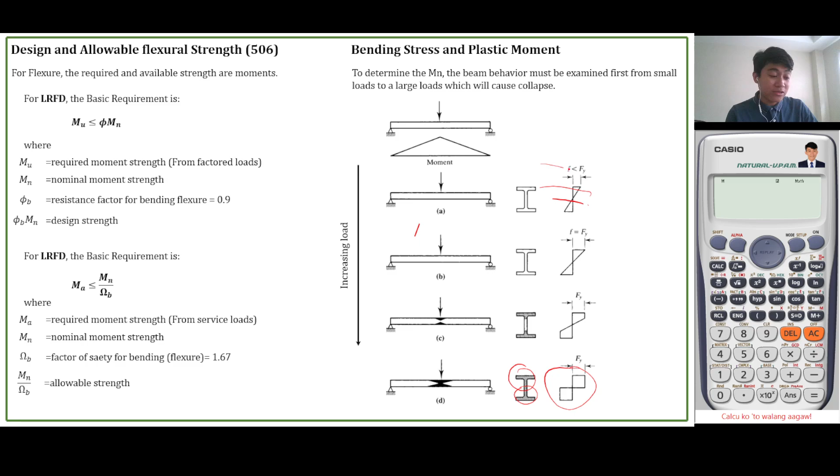Here it's still elastic, an elastic condition up to this point. Here it's transitioning from elastic to plastic condition. This part is purely plastic - it's about to collapse, guys. As you can see, the stress distribution is uniform, at the yield stress.

So if you try to analyze the compression force acting on the compression block, this is now your compression area, and this is the tension area of your steel. The uniform stress Fy, since this is already yielding, is uniform on compression and tension. So the compression force will act on the centroid of the compression area - compression force is stress times the area, area C, area of the compression block. That is also equal...

Take note, the forces here must be in equilibrium - tension must be equal to compression, so that it doesn't yet collapse, because it's still in equilibrium. So the tension is equal to the area of the tension side times the yielding stress.

So what we're going to do is calculate later the moment capacity of this section. The moment capacity is the induced moment by the compression and tension force, or the resisted moment of the compression and tension force - that is your plastic moment.

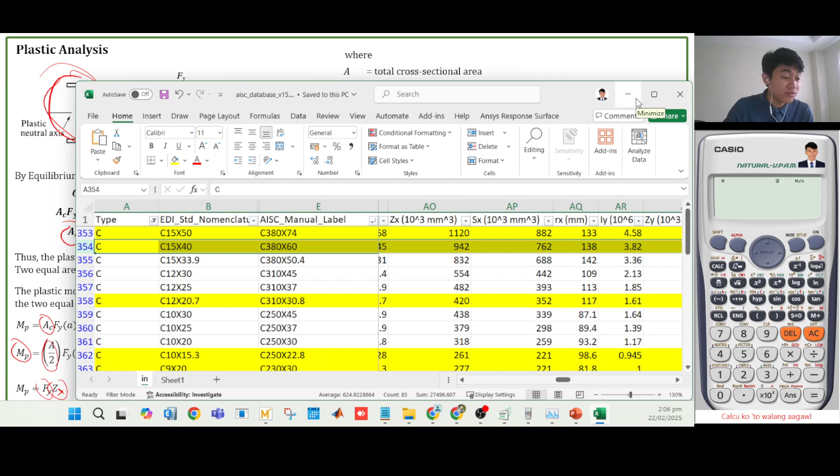We have a channel, 380 by 60. So we have the value of Zx, which is 942 times 10 raised to 3. The AISC database already consists of those calculated values of section modulus, and that's how we compute the plastic moment: the yielding stress times the section modulus Zx.

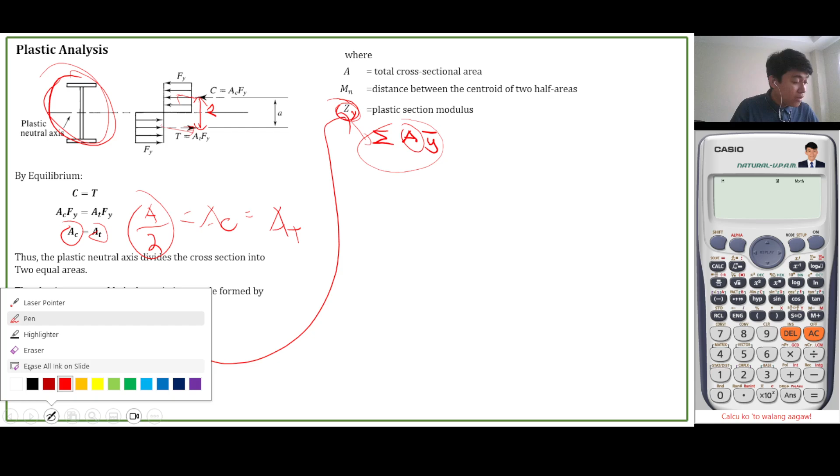What if we have a built-up section? How do we solve this Zx? Because for a section that's in the database, the section modulus is already given. But for a built-up section, you have to solve for that.

So let's try to solve problem number 1. Let's try to solve the plastic and elastic moment. What is the difference between the plastic and the elastic? Let's try to solve it.

Now, we have here a built-up section shown in the figure. It will bend about the x-axis. The steel is A572 with an Fu of 450 megapascal and an Fy of 345 megapascal. Determine the yield moment, the plastic moment, and the shape factor of the section.

Let's get the section properties. Actually, it is made up of plates. The base flange is 250, so let's put the dimensions: base flange is 250, thickness of flange is 25. But this is made up of plates.

So the D is 360, because we have a plate 360 by 16. So the total depth is 360. The thickness of web is 16. E is 200 gigapascal, Fy is 345 megapascal.

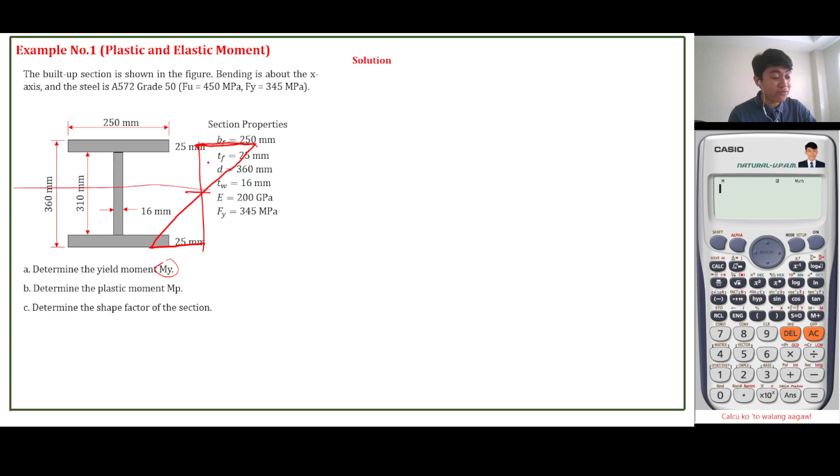But before that, let's solve the yield moment. The condition of the beam is still in elastic condition. If we try to draw the stress diagram, this is how it looks: from the neutral axis, stress is zero, and it will yield only at the extreme fiber. So what is the moment given by this cross section?

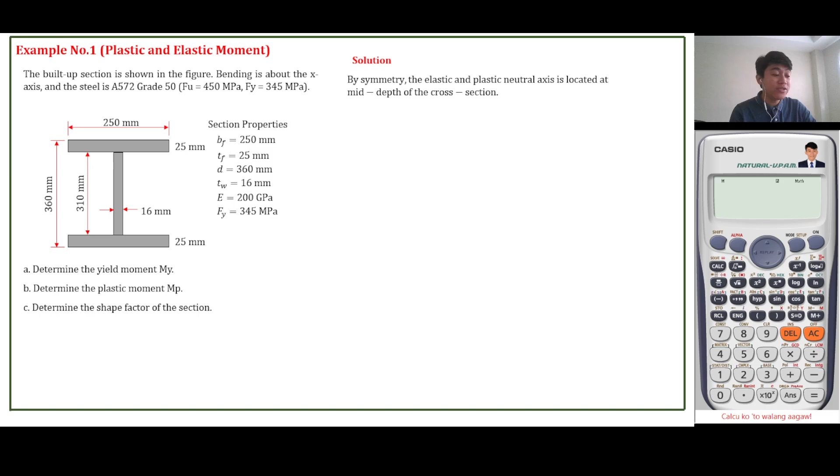So we need the elastic properties such as the elastic neutral axis. Now for single symmetry or double symmetry sections, for a double symmetry section, the plastic neutral axis is located at the same position as the elastic neutral axis.

For a section symmetric about the x-axis, wherever the location of your plastic neutral axis is, the elastic neutral axis is there too. So in the middle, by symmetry, the neutral axis is at the center, which is also the plastic neutral axis.

Later on, we'll try to solve an unsymmetrical section so you can identify how it's solved in a different way. Of course, the elastic neutral axis is solved using statics, Varignon's theorem. The plastic neutral axis uses a different approach — as you saw earlier in the derivation of the formula, you just equate the area of compression to the area in tension.

Okay, let's start to solve this. First, we have to solve the yielding moment. We need the elastic properties, the moment of inertia about the x-axis. So to get the moment of inertia, let's consider this as a whole rectangle so that we no longer need to use the transfer formula.

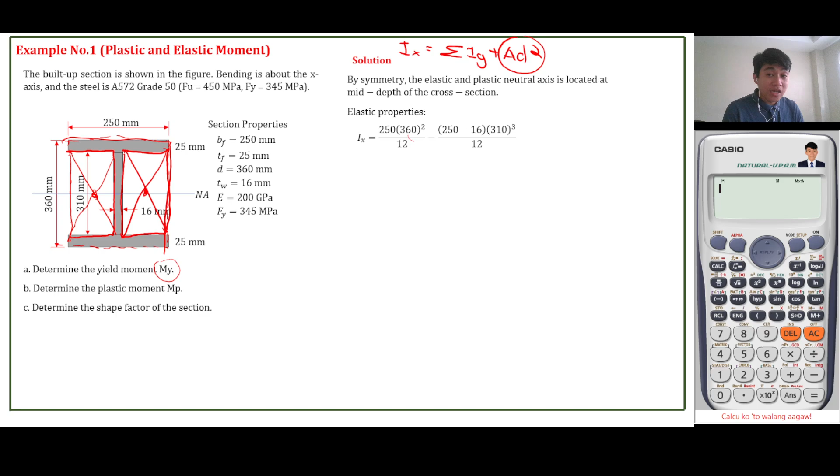Their centroid already coincides with the neutral axis, so therefore you don't have to perform the transfer formula. Again, the transfer formula is the summation to get the moment of inertia about the x neutral axis: the summation of Ig plus Ad squared. You need the Ad squared only if the centroid of your area being considered does not coincide with the neutral axis. So far, all of our areas coincide with the neutral axis.

So we don't need to transfer this hole. The dimension of the hole is 250, minus 16. So that will be your B. H is 310 cubed over 12.

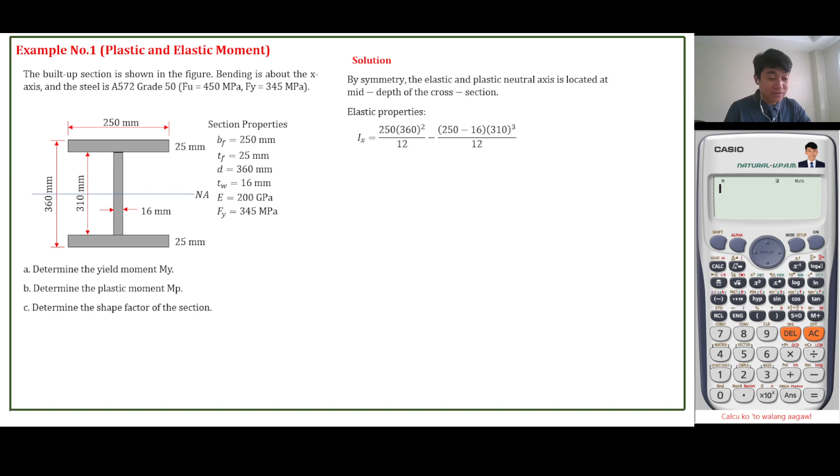Solving this value, let's solve this on your calculator. So the value is 391.0755 times 10 raised to 6 millimeter raised to 4. That is the moment of inertia about the x-axis.

So next is the section modulus. We have the so-called section modulus for calculating the yielding moment. A section modulus, for a section in AISC, has aspects related to it too. Let me share this with you.

So how do we solve for Sx? To solve this Sx, you just have to divide Ix by C. What is C? C is the distance from the neutral axis to the extreme fiber.

So which is more extreme, the compression or the tension side? Technically, since the neutral axis is at the center, the distance of compression is just equal to the distance of tension. So they will have the same distance.

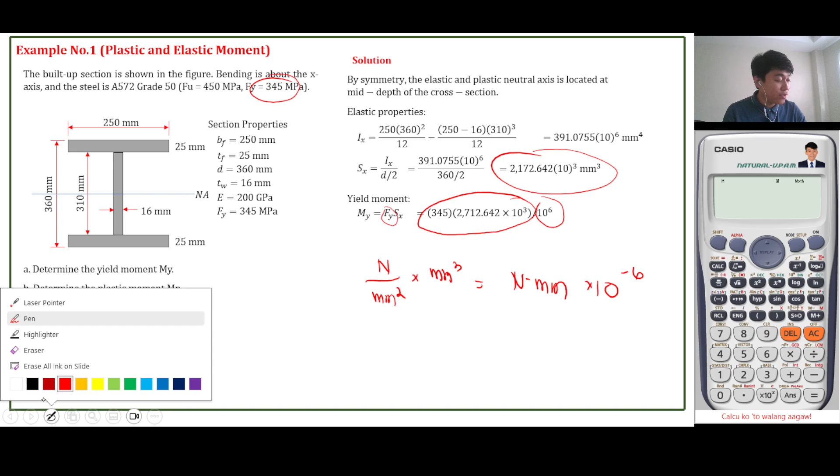So what will be the answer for the yielding moment? Calculating this, that will be equal to 749.56 kilonewton meter. That is your answer for the yielding moment.

So the section should reach 749 for it to yield, for our stress to look like this. Only the end yields, only the extreme fiber, that's when it starts to yield. That will be your stress diagram: compression side, tension side.

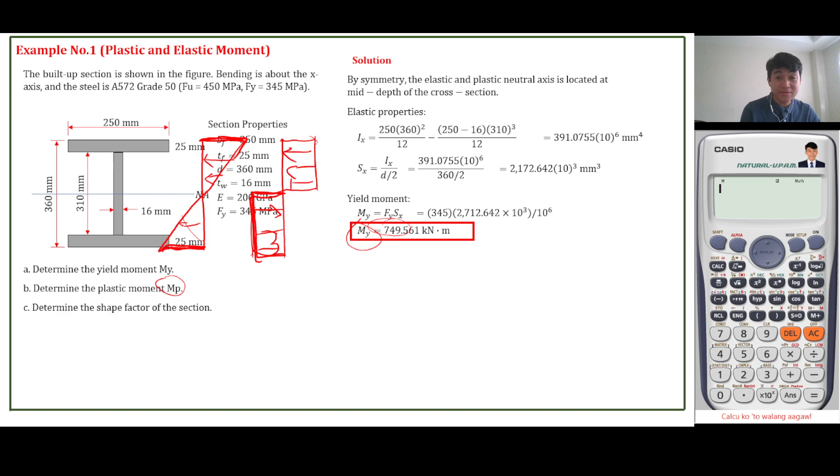So what about the plastic moment? What is the value? Of course, the plastic moment is always greater than the yielding moment, because once our section becomes plastic, this will be the stress diagram, where all the stress has yielded. So obviously, the moment given by that is bigger. So the plastic moment should always be bigger than the yielding moment. So let's calculate the plastic moment. You have to solve the plastic section modulus. Anyway, this one is elastic.

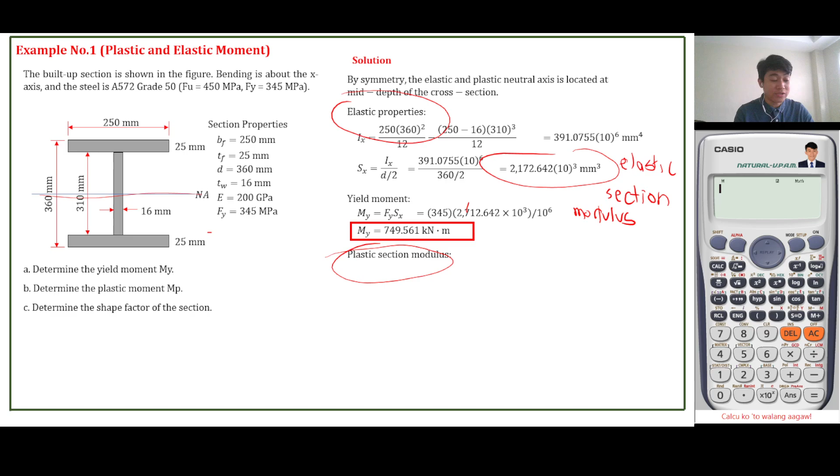Sx is the elastic section modulus because that is derived from the elastic condition, from the elastic neutral axis. So what is plastic section modulus? Plastic section modulus is Zx.

From the previous presentation, we can calculate the Zx using the area total over 2, multiplied to the A. Meaning you are going to get the location of the centroid, since the plastic neutral axis coincides with the neutral axis of elastic. You get the centroid of this one, and then you get the centroid of this compression - that becomes the A.

And then area total, if there's an area total, divide by 2 times the A - that is the Zx. But we have another way to calculate that, so you don't need to do centroid-centroid. You just need to get the summation of A times Y. All of your area will be taken as moment going to the plastic neutral axis.

For example, this area here, let's take the moment going there. You need to get the centroid. That's how we got the 167.5. Let's check how we got 167.5.

You need to get the area - that is 250 times 25 times the distance of 167.5. How did we get that? This is 310 over 2, then we add the thickness of the flange over 2.

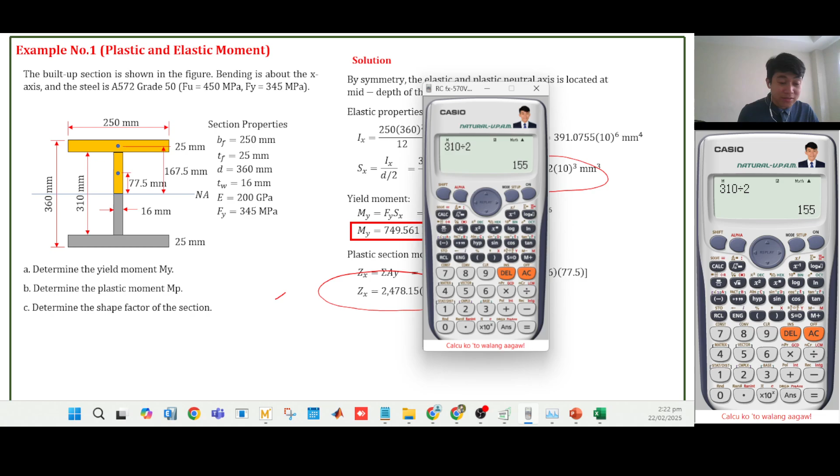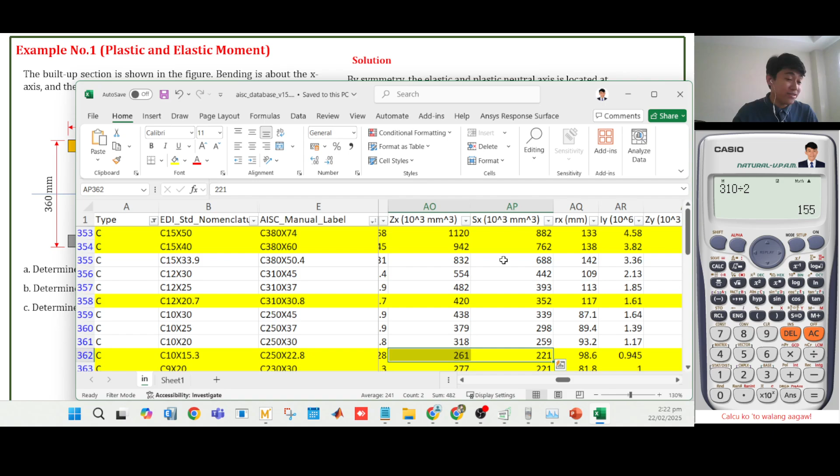And that Zx will always be greater than Sx. If you look at the database, that is always the trend - Zx is always greater than Sx, always greater than. You won't find any case where your Zx is smaller than Sx, class. So your database is wrong if your Sx is bigger than Zx.

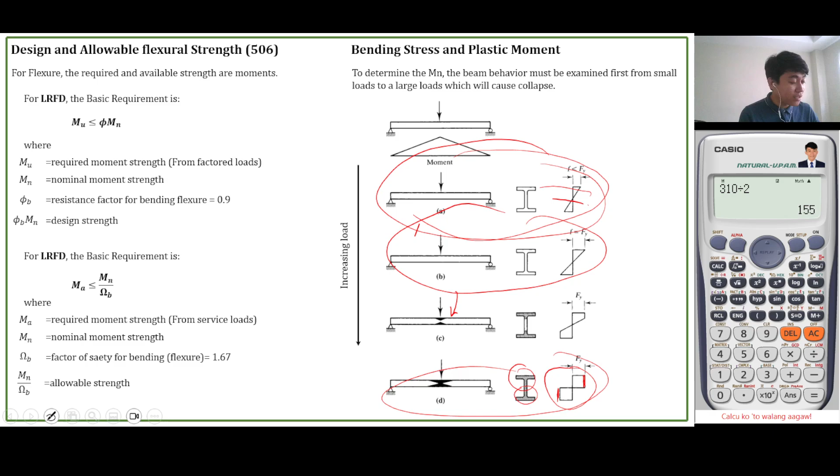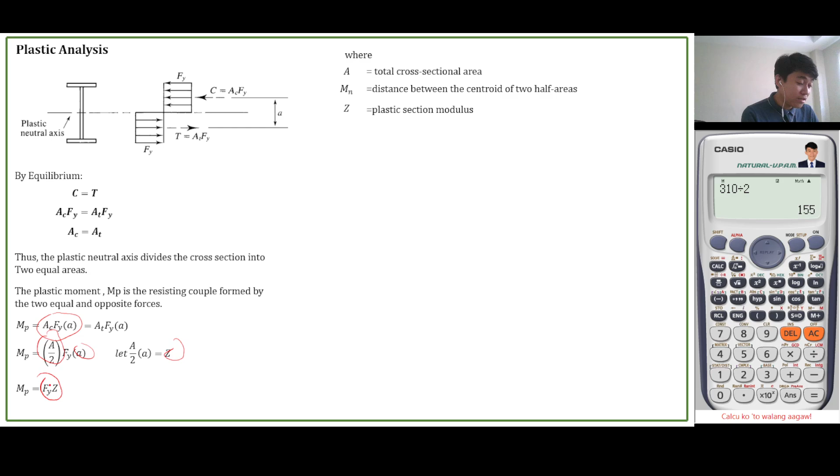So now, how do we calculate the plastic moment? From the discussion earlier, we derived how to calculate the plastic moment - Fy times Zx. From this, we derive, letting A over 2 as Z, so A over 2A is Z, so we have Fy Zx.

You just multiply the Fy to your Zx. Fy is 345 megapascal times Zx, divided by 10 raised to 6 to convert to kilonewton. So we have 854.960 kilonewton-meter. That is your plastic moment.

So what is this shape factor? Actually, for shape factor, you just have to divide the Zx by Sx, or plastic moment by the yielding moment. It should always be greater than one - why is that possible? Because Mp is equal to Fy Zx, and My is equal to Fy Sx, so you can just cancel the Fy.

That's why you can use the section modulus - again, this one is elastic section modulus, this one is plastic section modulus. So the shape factor must always be greater than 1. Let's use the section modulus here - dividing 24 by 21 will give us 1.14.

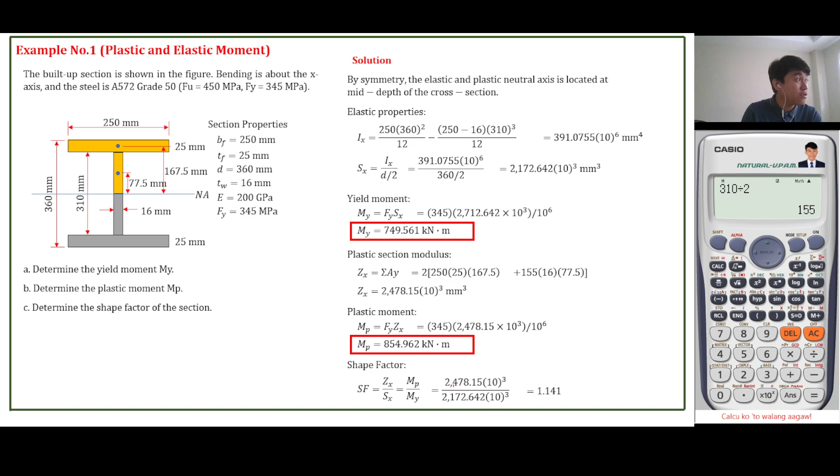That's it, no? Fortunately, this is a symmetrical section. What if the section is not symmetrical about the x-axis? How do we solve the section? How do we solve the plastic moment and the yielding moment?

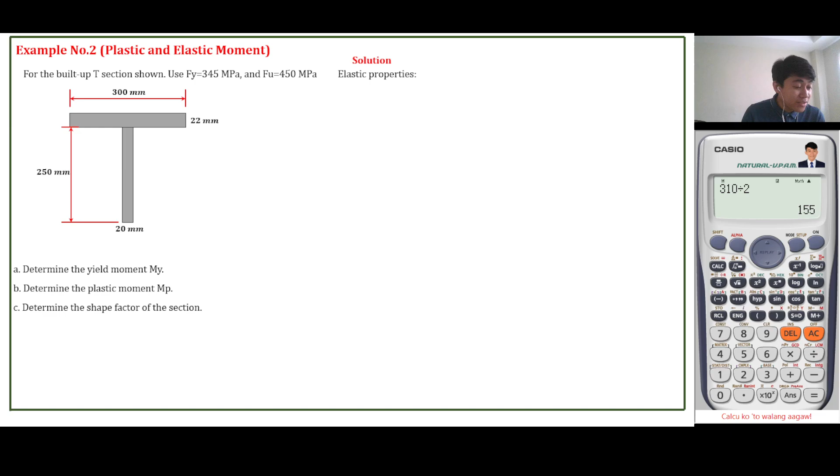So let's say we have here A2. For the built-up T section, of course this is built up, we have to solve for all the material properties because we don't have any data for built-up sections in our database unless it's a thin section. So first, let's calculate the elastic properties.

Let's calculate the elastic neutral axis. The elastic neutral axis can be identified using Varignon's theorem. Let's calculate the neutral axis from the top of the flange. We divide this into common areas, area 1 and area 2, so that we can easily perform Varignon's theorem, because we know the centroids of those common areas.

For example, this base times thickness of flange, we know that the centroid is at 22/2, in the middle. As for this area, the centroid is also just in the middle. And their centroid is not on the middle axis. We will transfer that later, for the moment.

But let's focus first on the neutral axis. Let's put this in a table so it's easier for the class, especially when we get the moment of inertia. First we get the area, base times height, so we won't have a hard time with the moment of inertia. Let's list it as base times height. So what will be its area?

So 300 times 22. That is equal to 6,600. Next, area 2, so we have base times the height of 250. So 20 times 250, that is 5,000. So we now get the total area of A1 and A2, 6,600 plus 5,000. So the total area is 11,600.

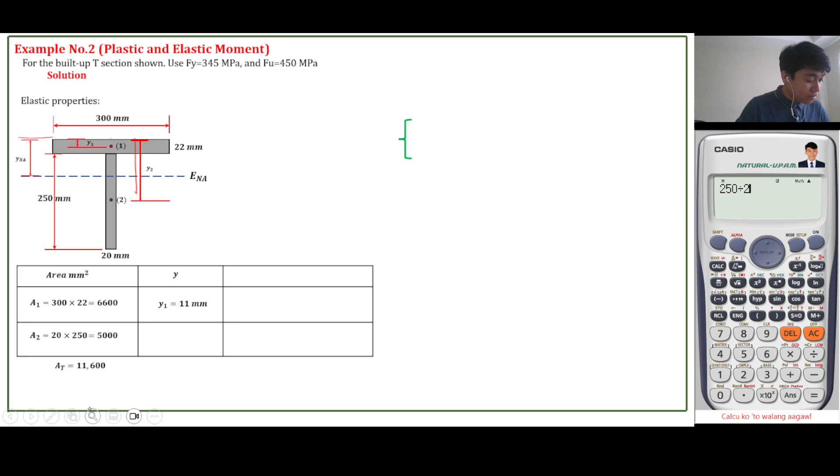So the center of 250, 250 over 2, plus this, the 22. We go towards that. So the center of 250 plus the thickness of the flange. So that is 147.

We can now perform the Varignon theorem, A1 Y1. So A1 is 6,600 times Y1 of 11, plus 5,000 times 147, over the total area of 11,600. So we have the answer: the distance of the neutral axis from the top portion is 69.621. This is the distance of the neutral axis to the top fiber.

But take note, guys, getting the ZX requires us — sorry, we're still in the elastic stage. Getting the S is equal to IX over the distance from the neutral axis to the extreme fiber. So we have to compare which is more extreme: from the neutral axis going up, or from the neutral axis going down. Which one is more extreme? So later we'll do the correct one.

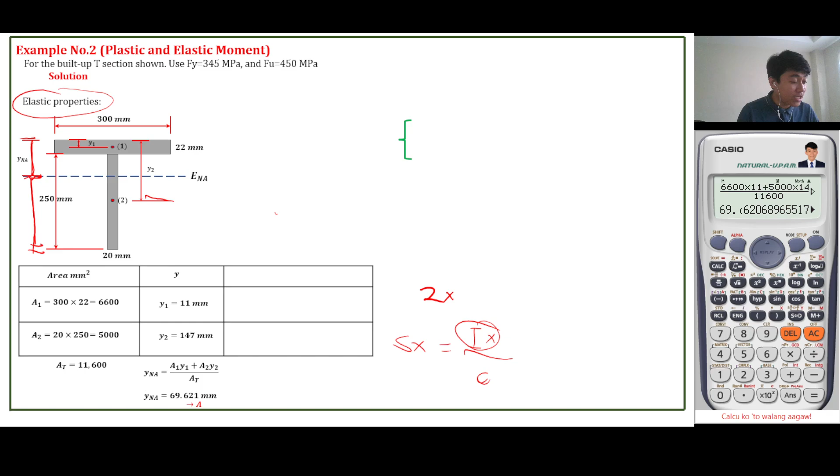Okay, but before that, let's calculate first the IX, moment of inertia. In this case class, we have to perform the transfer formula because our individual areas' centroids do not coincide with the neutral axis. So we transfer this. How do we transfer? IG, moment of inertia of the individual area, plus the area times the distance of the centroid going to the neutral axis.

That is d. So how do we solve that d1? You already have Y, just subtract it from Y1. That's D1. How do we solve this one? You have Y NA from the neutral axis, just subtract 1 minus 2. Get this, then this, minus this — just here.

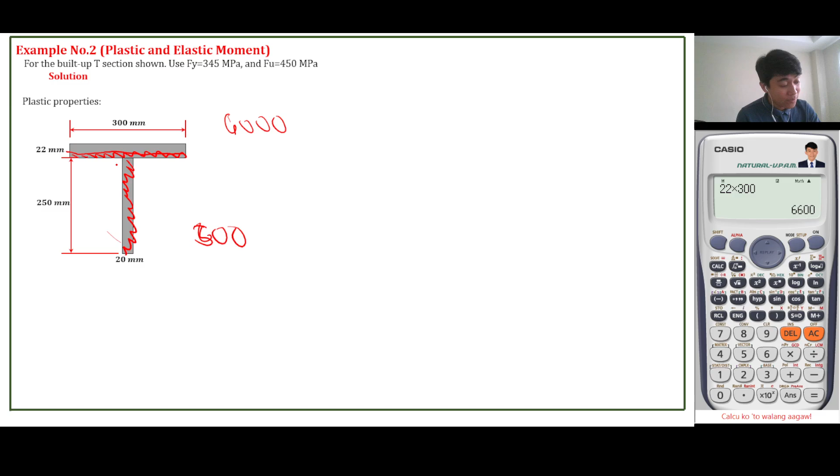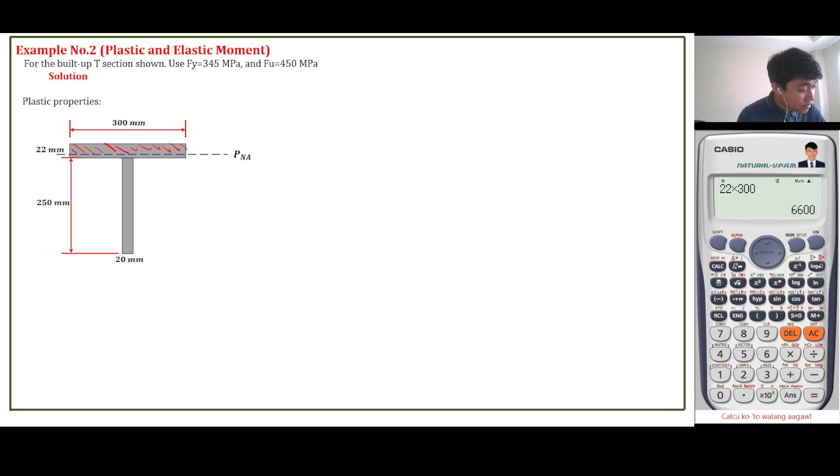Doon sa area. So let's perform. Now, let's say this is x, yung height natin. We do not know yet that x.

So that we have area of compression equal to area of tension. Area of compression, itong yellow na to. Area of tension, itong gray na to. And our answer should be less than 22 kasi usually nandiyan siya.

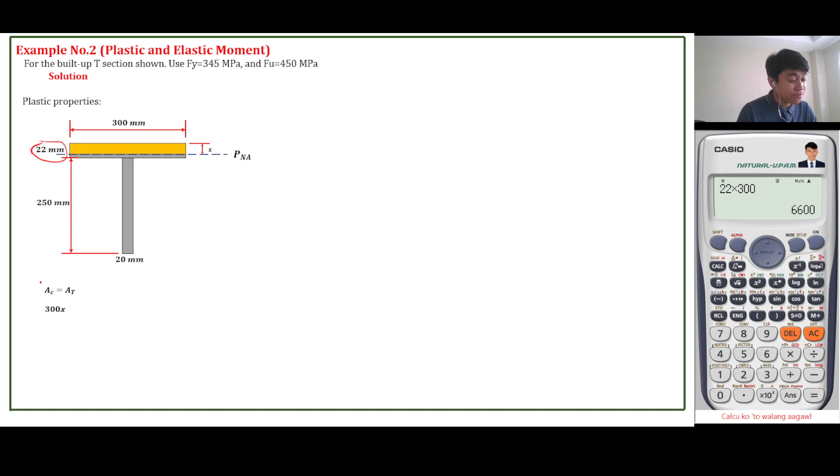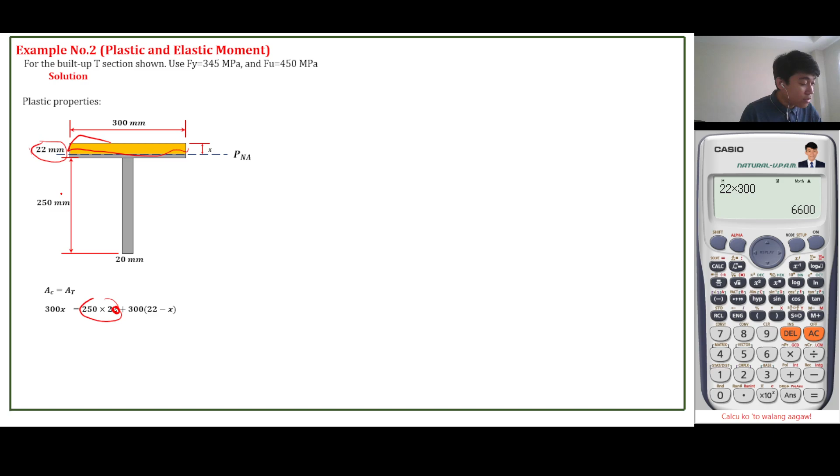Okay, dapat kinukuha natin 22 minus x. So we have 300x, area ng rectangle is equal to 250 times 20. Yung height mo nito, yung maliit na to, that is 22 minus x. So kaya yun ang ating equation.

Let's try to solve this. 300x equals 250 times 20, times 20. We add this 300 times 22 minus. Yung area mo ito ay maliit sa taas na portion. Then the value of x must be less than 22.

So let's return. 19.333. So let's store this value. Now we have the location, measured from the top, the location of the plastic neutral axis is 19. Iba siya doon sa elastic neutral axis.

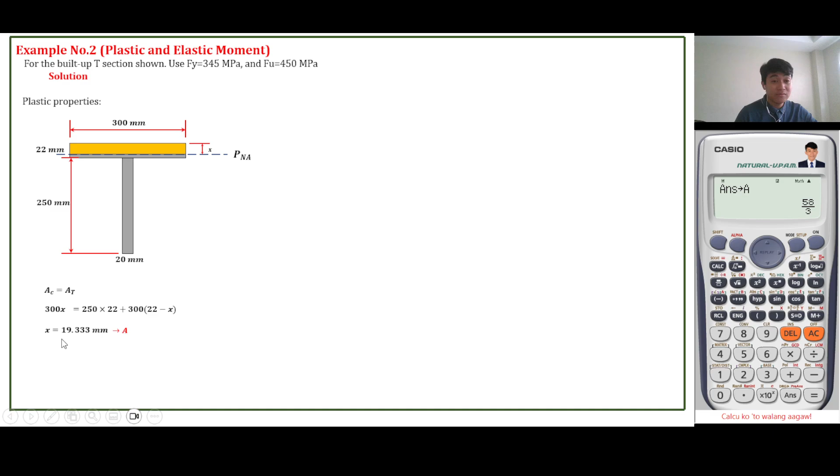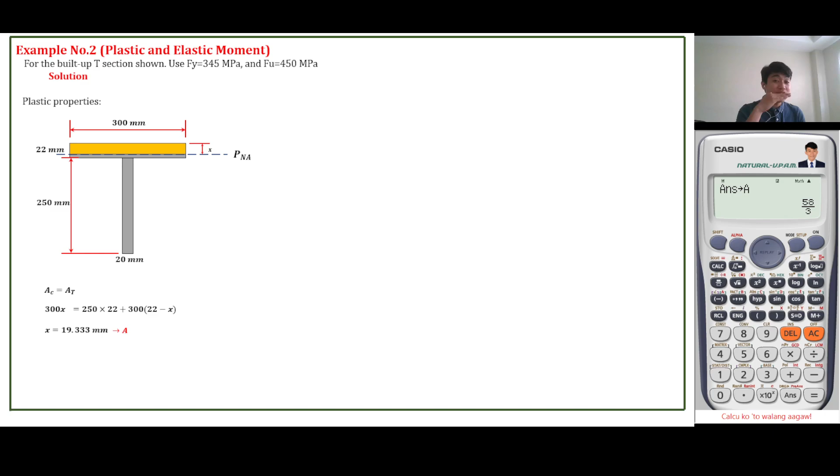Nasaan yung plastic neutral axis? From the top, 69. Ang plastic, nasaan? 19 lang. Take note, for unsymmetrical about the x-axis, the elastic neutral axis does not coincide with the plastic neutral axis. Pero kapag symmetrical yan, katulad ng problem number 1 natin, pag I yung section, the plastic neutral axis coincide with the elastic. Pag symmetrical.

So now, let's compute the plastic section modulus. Ito na yung Zx, calculate that. You have the summation of A times Y, lahat ng areas na to, class. So meron, nahati yan sa tatlong area.

Ito. Then imo-moment natin, papunta sa neutral axis. Nahati yan sa tatlong area. Ito, muna ito yung dilaw, yung gray. Isa-isahin natin yung class, i-moment papunta doon sa neutral axis. Unahin na muna natin yung compression.

We have 300, in-store natin sa A. 300 times the area times the distance of the sample, kalahati ng iyan, papuntang neutral axis. Maliit na to. Plus, ito naman, dito, anong area niyan? Diba that is 300 times anong height nito? Maliit na height na yan. 22 minus x, that is the area. Nawala.

Plus 300 times 22 minus x. Anong distance niyan? Papuntang centroid. So this is 22 minus x over 2. A pala, nakastore pala sa A ang ating x. So what's next? Ito.

Yung web natin, yung web, so which is 20 times 250. Ano distance niya? Papunta doon sa centroid, 250 over 2. Magpa-plus pa tayo nito, plus 250, ano pang distance natin? 22 minus. Okay, so yan yung ating zx.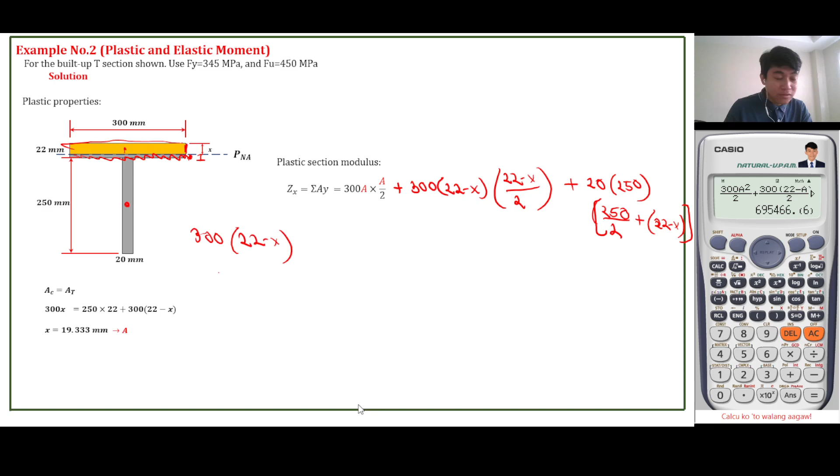250 over 2 plus itong 22 minus... answer. Ito, 695. Gawin na lang natin times 10 raised to 3. 695. And let's store this value sa B, 695.467 times 10 raised to 3.

Try natin sa B. Now the plastic moment, MP is equal to FYZX. FY natin is 345 megapascal times in-store natin sa B, i-divide natin sa times 10 raised to 6. Kaya 345 times 10 raised to negative 6, para maging kilonewton, so we have 239.936 kilonewton. That is your plastic moment.